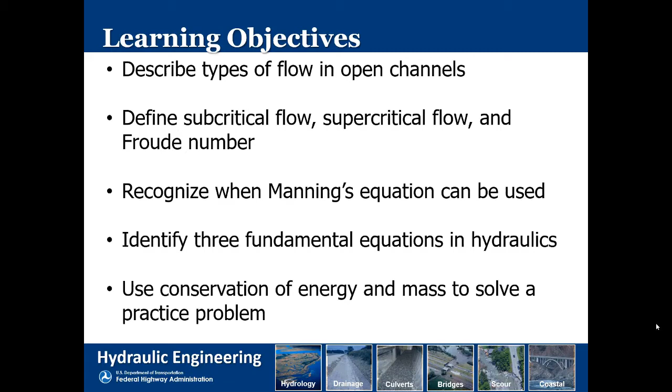And then we're going to do a couple of really quick practice problems using conservation of energy and conservation of mass to solve a couple practical problems.

So resources—one of the key things coming out of this, and one of your key takeaways: if you want more information on anything that we talk about during this week, where can I go to get that information? The primary source is the Federal Highway Hydraulic Engineering website. And if you're one of those folks who has trouble remembering all of the web links until you have it listed as one of your favorites, I'll do what I do.

I'm not actually supposed to say Google it. I think I'm supposed to use more general terminology because all of us government employees can't market proprietary things. But I always use Google - I find it to be the best web search engine, to be honest.

So if you ever wonder about any of these resources, HDS4, you can go into Google and type in HDS4, and it should point you in the direction of our website. We have lots of goodies up there - I think you were watching some of Jim's YouTube videos on culvert concepts, open channel flow concepts, inlet breaks, and other types of things. We continue to develop more videos, so stay tuned. We have about 3 different projects in the works with more hydraulics related YouTube videos.

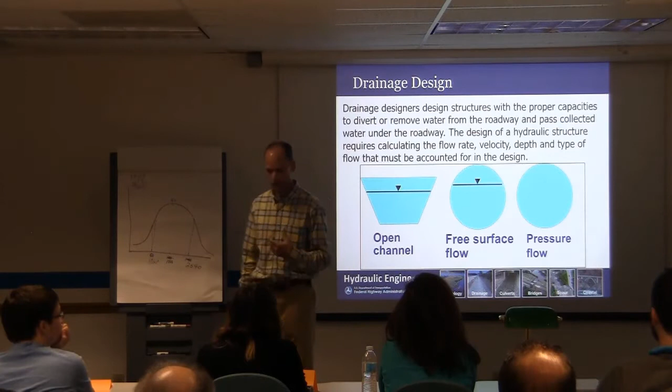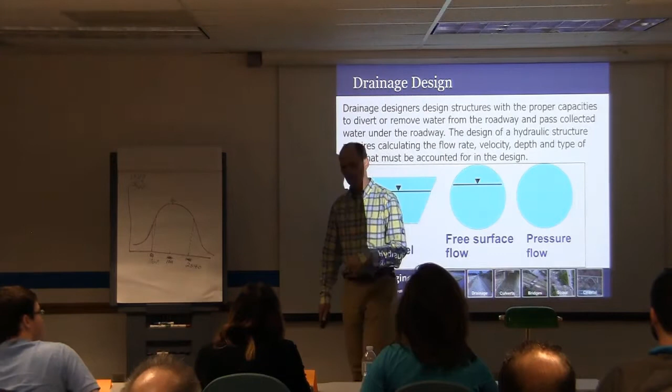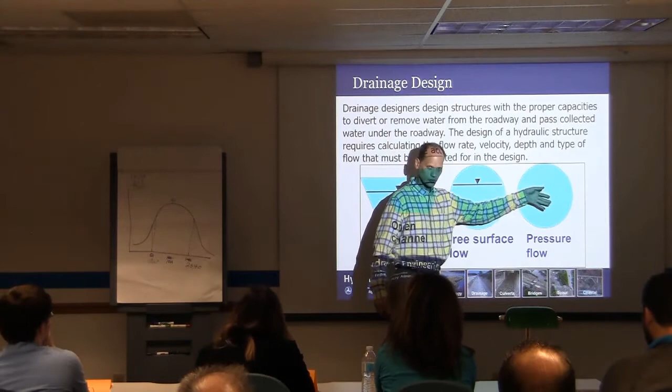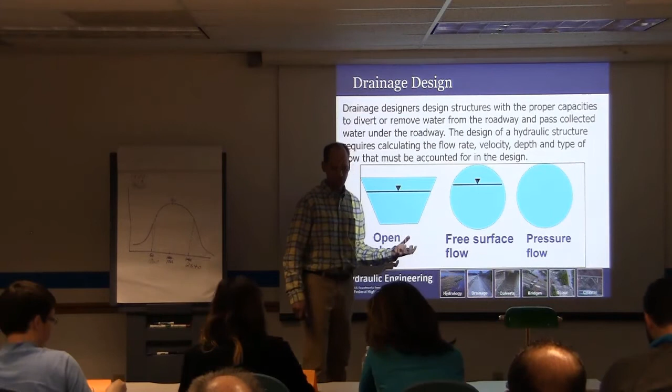Drainage design, we talked about it. We take our flows, our Qs, and then we calculate certain things. Some of the key parameters we're typically interested in: velocity, flow depth, shear stress, and those sorts of things. As roadway designers, you're primarily dealing with open channel flow, so you have a free surface that's exposed to atmospheric pressure, or free surface flow in a conduit. When you design your storm drains for gravity flow situations, they will have a free surface in the storm drain itself. Every once in a while we get into pressure flow - we'll talk tomorrow about outlet control culverts, and they flow in either a subcritical mode or a full flow mode. If they're flowing full, then they're in pressure flow. But we don't deal a lot with pressure flow in our careers - that's more water supply and distribution type stuff. And if you get into pump stations, then of course you have pressure flow situations too.

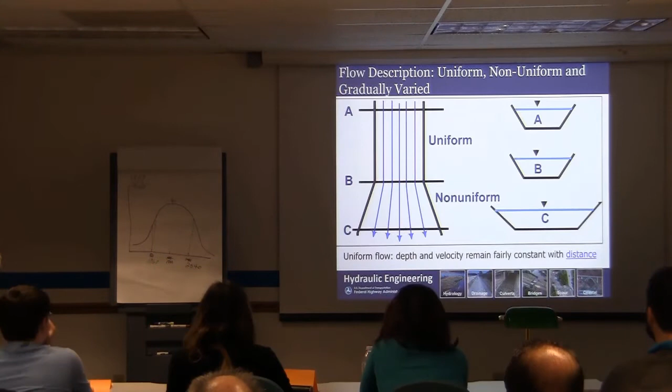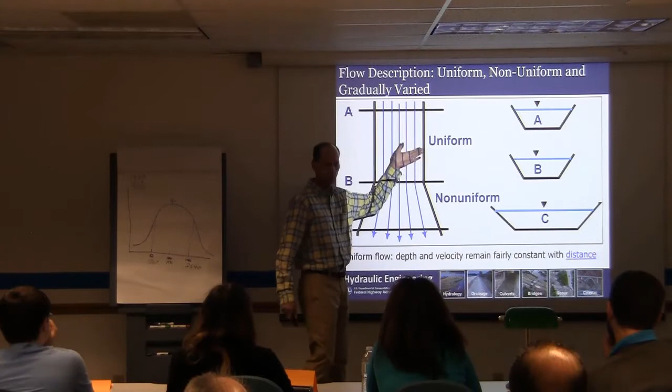All right, one key way we describe flow - remember, this is one of our learning outcomes - is uniform, non-uniform, and gradually varied. Uniform flow: the depth and velocity are fairly constant with distance - distance down your ditch line, distance down your open channel, distance through your culvert. If you have depth and velocity maintaining themselves in a fairly uniform fashion with distance, that's uniform flow. If your depths and velocities vary with distance, then it's non-uniform flow. Uniform flow in reality is very rare. Even with a prismatic or trapezoidal ditch line channel, you're going to have variations - you're going to have rocks in there, or a tree trunk or something, so you may have dips and bumps and things. So in reality, uniform flow is rare.

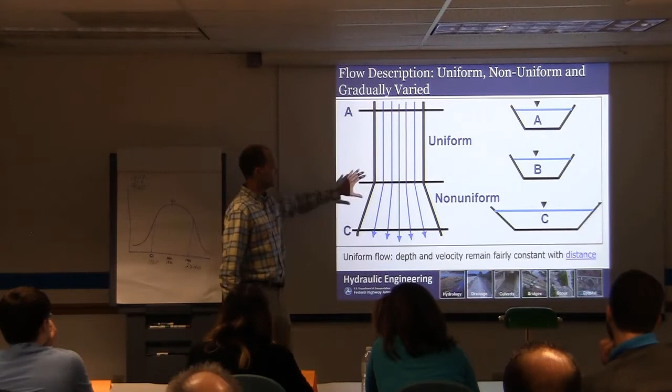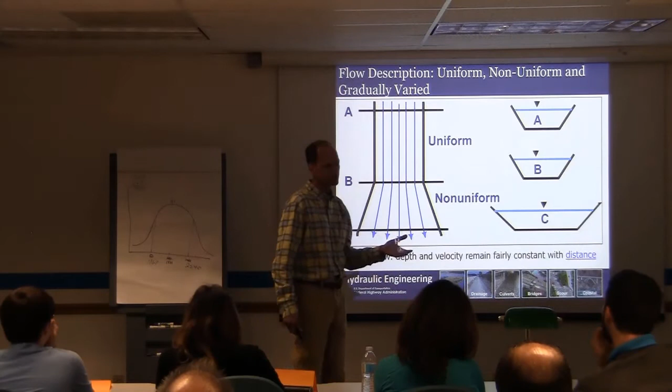We can get uniform flow in the laboratory through running water through a flume. In a lot of cases, we can get almost close to uniform flow. So actually, in reality, we look more towards gradually varied flow as probably more realistic, where you have some variations in depth and velocity with distance, but they're not to the degree where it's non-uniform. We're going to look at examples of these in a series of pictures coming up. So that's varying with distance - when you talk about uniform, non-uniform flow, automatically think about distance, and whether things are changing with distance.

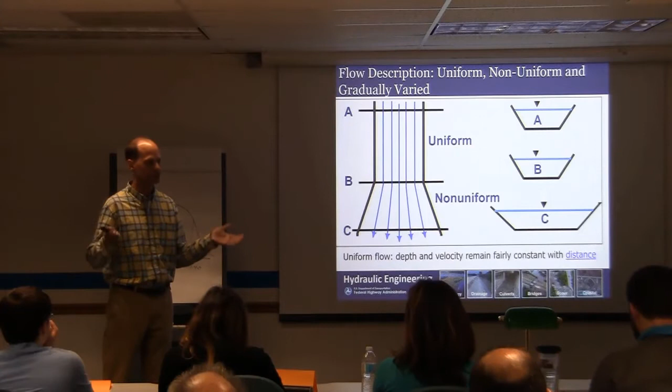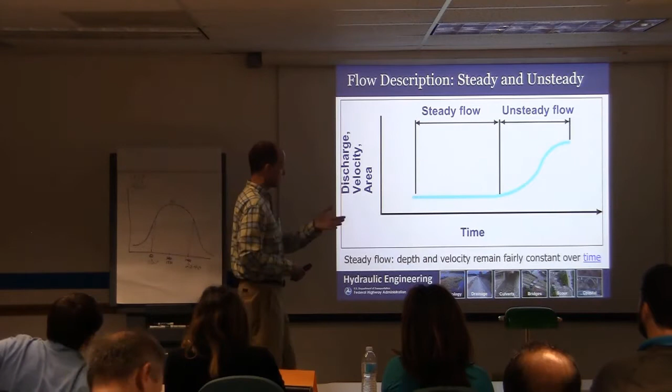Conversely, we also can describe flow as steady and unsteady. When you hear steady and unsteady, think about time, not distance. If you're standing on the riverbank looking across the channel, is the water surface going up and down with time? That's changing depth and velocity, and if it is, that's unsteady flow. If it's fairly consistent with time, maybe it hasn't rained in a while and you just have your normal base flow, groundwater feeding the channel, and it's fairly steady over hours and days, that's steady flow. So uniform and non-uniform describe distance, while steady and unsteady indicate a time component.

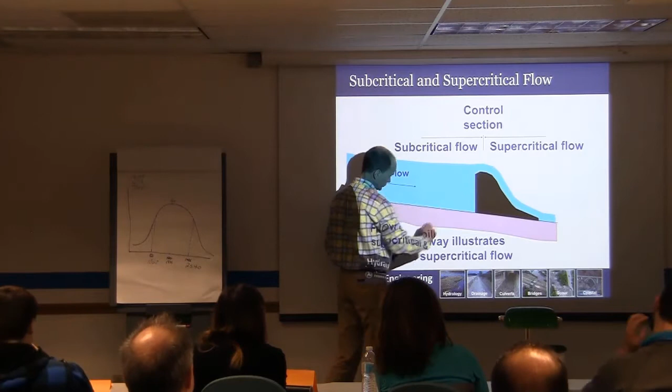Now into the good ones: subcritical and supercritical flow. Some of you have heard these terms before. We tend to envision water approaching and then going over a dam or spillway, like this ogee spillway shape here. On the upstream side, where you have some backwater, the water has built up and raised in elevation approaching the spillway. You may describe this flow as deep, more tranquil, slower moving. When you hear those terms, think of subcritical flow.

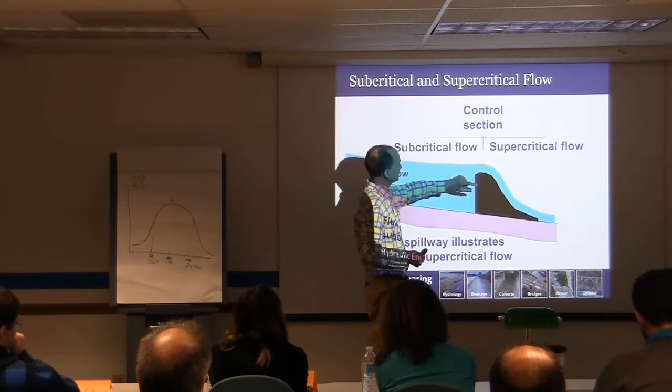And then the fun begins. It approaches the crest of the spillway and breaks through a control section. When you hear control section in the next couple of days, think critical depth. A control section is a point where we can actually calculate the exact depth of flow, so our control section here is critical depth.

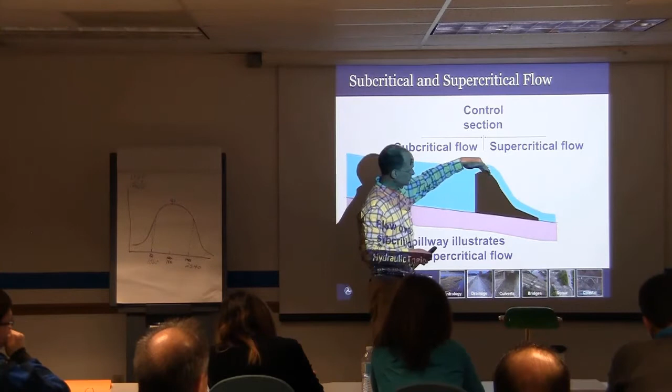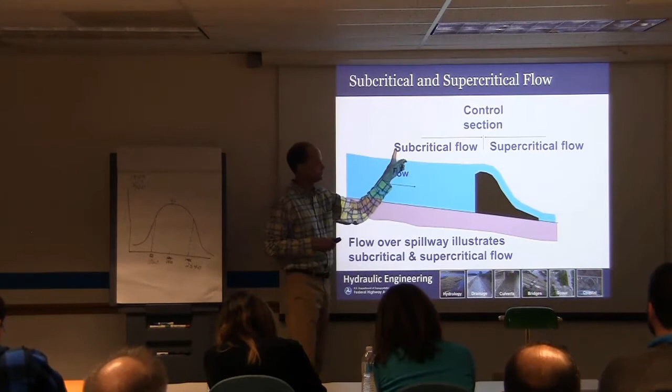So we have subcritical, deeper, tranquil flow approaching the ogee spillway, and then it goes over like a water slide shooting down, transitioning from subcritical to supercritical flow. Terms synonymous with supercritical flow: shallow, rapid, high velocity, lots of kinetic energy. Lots of kinetic energy in supercritical flow, lots of potential energy in subcritical flow. When you transition from sub to super, that's going through critical depth, your control section.

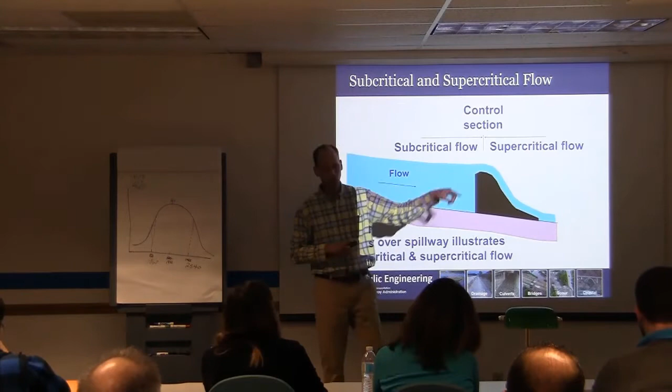How do you actually calculate if a flow is sub or supercritical? One good way is with our good friend, the Froude number. The Froude number is V over the square root of GY. V is the flow velocity, your average flow velocity, which you can estimate. The square root of GY is called celerity, the velocity of a shallow gravity wave.

So what does that mean? You go out to a lake with a nice big rock, put that rock into the water, and you see that wave spread out. The velocity that wave spreads out is the celerity. It's a ratio of these two, and you calculate a Froude number by taking the average cross-sectional velocity over the celerity.

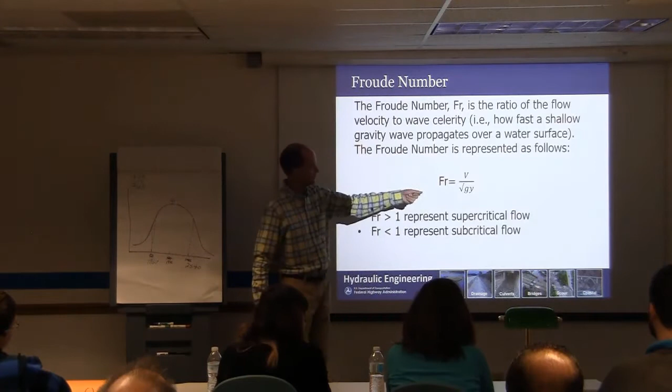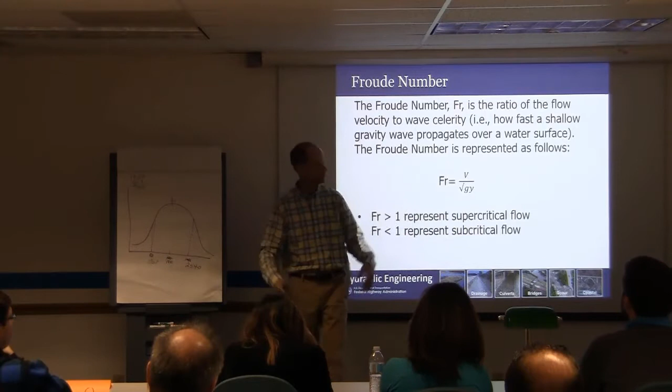If this number is larger than 1, your flow velocity is larger than the celerity of that wave. This means if you try to generate a shallow gravity wave by throwing that rock into a fairly fast moving stream, the wave will be washed downstream. Anything upstream doesn't even notice you threw a rock in there. The wave is just washed downstream, indicating a higher velocity. Supercritical flow has Froude numbers greater than 1.

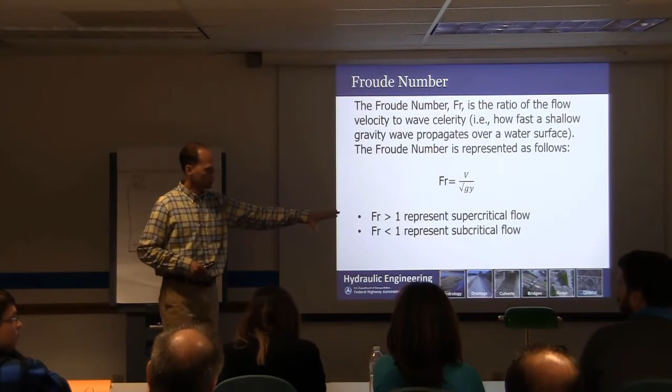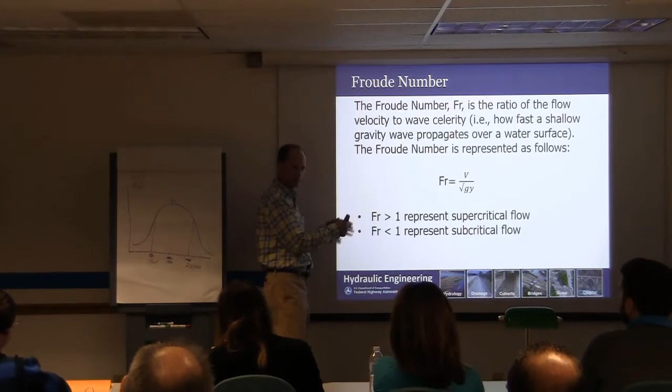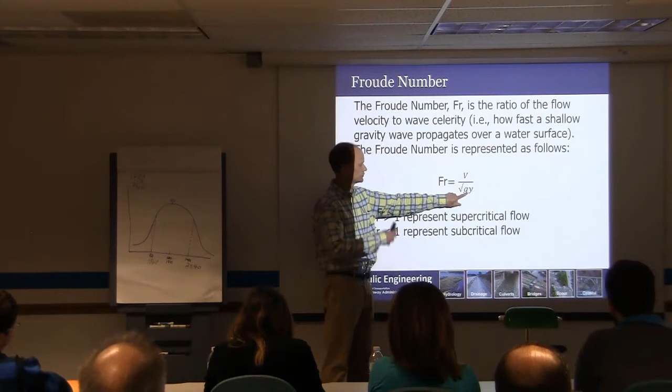Conversely, if you go out to that lake with a nice slow tributary coming in, a slow moving stream easing in, and you throw that rock in, it'll propagate downstream for sure, and some of that wave will also propagate upstream, because the velocity of that flow is less than the velocity of that shallow wave. So it moves upstream: slower moving velocity, Froude numbers less than 1, subcritical flow.

In between the two, where you have a Froude number exactly equal to 1, we say we're going to calculate this critical depth. In reality, there are places where you find critical depth, but it's at a point. Like when we had that ogee spillway, there's one point over the top of that spillway where you have critical depth. So you're not going to have it over an extended reach length, a ditch line, or stream. It's typically at a point, and it's a transition from sub to supercritical flow.

You can actually calculate critical depth. Here's a general equation for it: your flow associated with critical depth squared divided by the acceleration of gravity, the area of the flow associated with critical depth, the top width of the water.

Whenever you see capital T in hydraulics, that typically indicates the top width of your flow. So here's a general equation, and you can turn this into how you calculate critical depth for a rectangle. Other shapes become a lot more complicated, like trying to calculate critical depth of flow in a culvert, a circular section. So what they've done is develop charts where you go in with your flow and look up the critical depth in a pipe. I think they've done other shapes too. We don't care because we figure that out in the hydraulic toolbox, so we don't calculate it by hand.

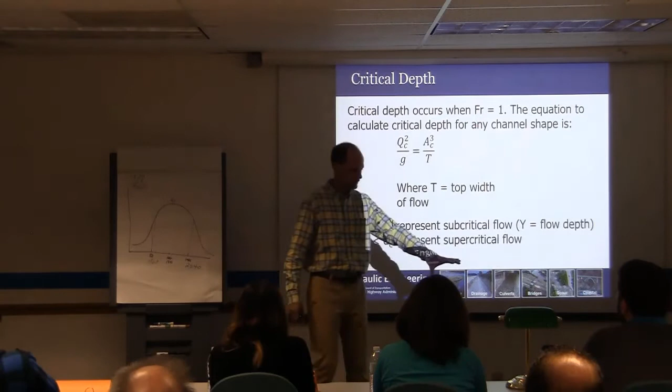If you calculate critical depth and say it's like a foot, that's dependent on your cross-sectional shape. Say we calculate this hypothetical critical depth and it's a foot. If we have water that's deeper than critical depth, what type of flow would that be? Deeper, it's subcritical depth, that's subcritical flow. If you have a flow depth of half a foot, it's shallower, less than critical depth, that flow would be described as supercritical. See how this is kind of all coming together?

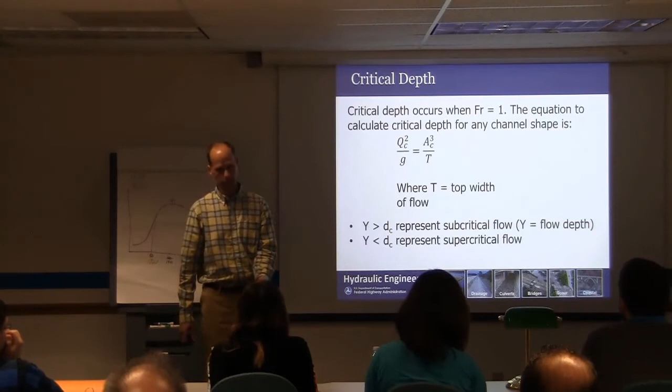If I personally were to describe supercritical flow to someone, I'd say it's kind of shallow, it's rapid. If you've done whitewater rafting, kind of bubbly, white watery. The Froude number is greater than 1, the depth is less than critical depth. These are all indications of supercritical flow.

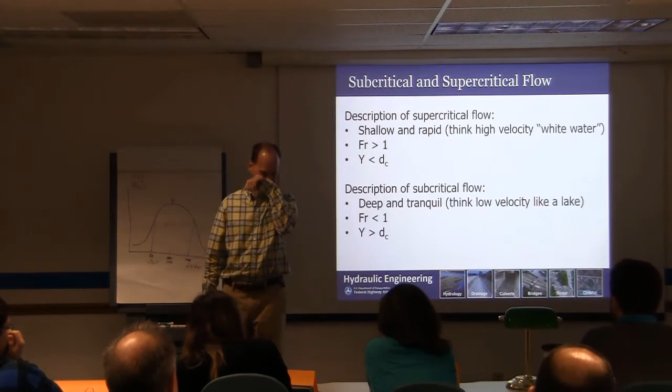Vice versa, subcritical flow - it's deeper, it's more tranquil. Picture yourself maybe in a pond or a lake or whatnot. That's really subcritical flow, but you're getting the idea. The Froude number's less than 1, the depth is greater than critical depth. Those are all indications of subcritical flow. It just sounds kind of mellow, right? Subcritical flow.

And why is the hydraulic depth correct? Or, I'm sorry, why is it just the flow depth? Technically, we use hydraulic depth in open channels. But we're just trying to keep things a little more general, so we're just saying flow depth, comparing that to our critical depth.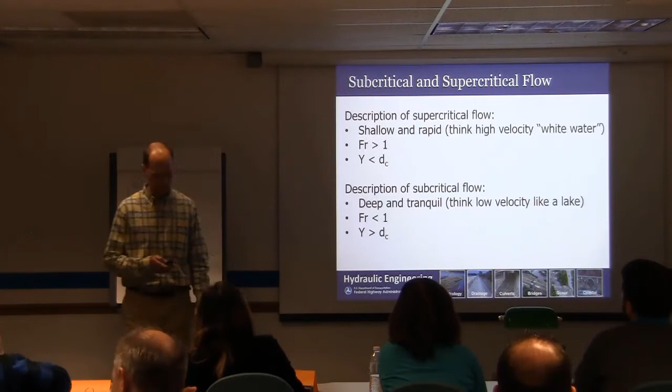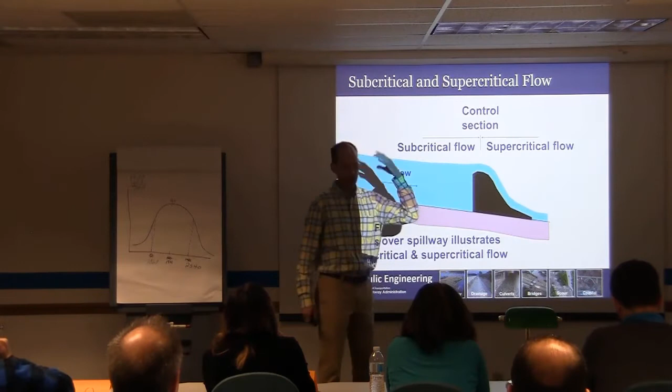So once again, this ogee spillway, and you'll see this again tomorrow when we talk about culverts - sub, super, control section. When you hear control section these next couple of days, think: where's critical depth? It's at the control section.

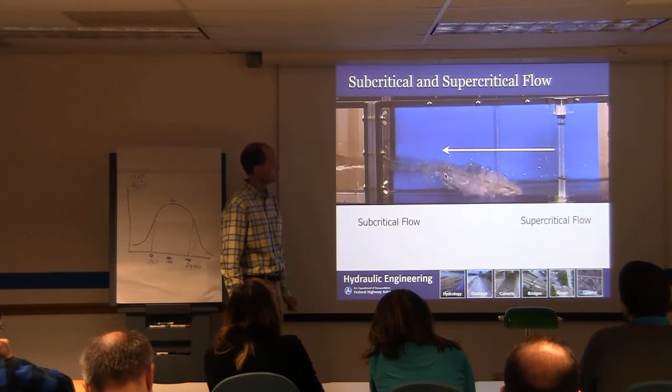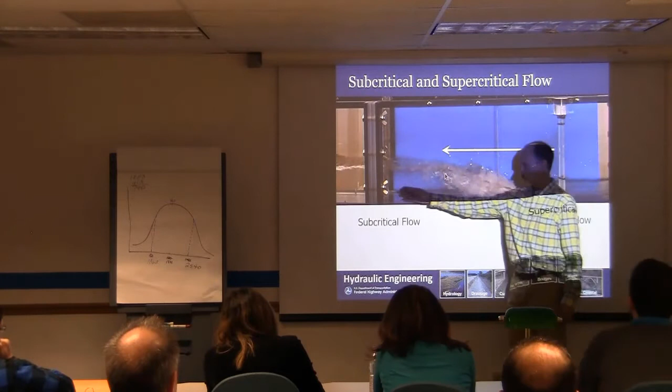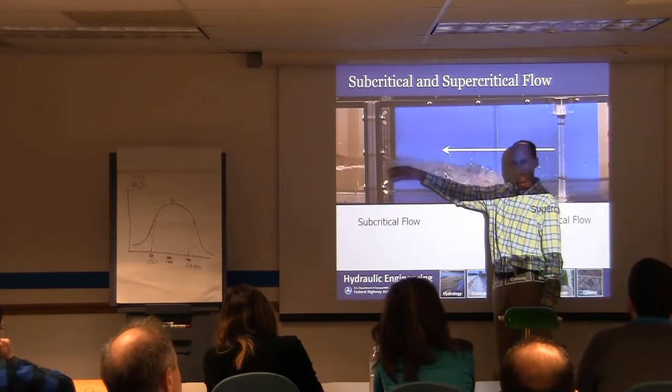If you watched those YouTube videos, I think Jim actually demonstrated a hydraulic jump, exactly. What you have here is this shallow, fast-moving flow, supercritical flow. And then all of a sudden you come into a situation where you have high tailwater or high downstream water level, and the momentum of this is smashing into that, and it's jumping up into subcritical, the deeper, slower moving flow, subcritical flow. That transition only goes this direction for a hydraulic jump - that's the transition from supercritical to subcritical.

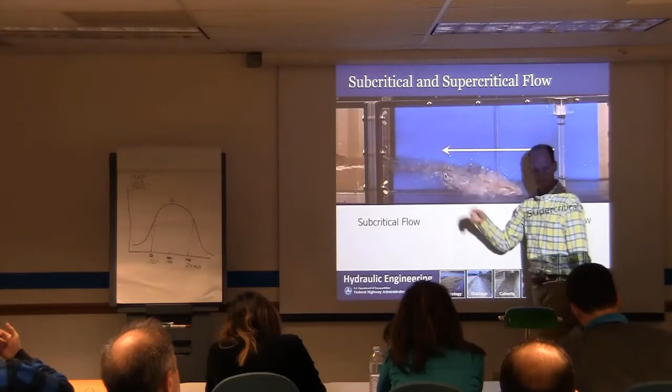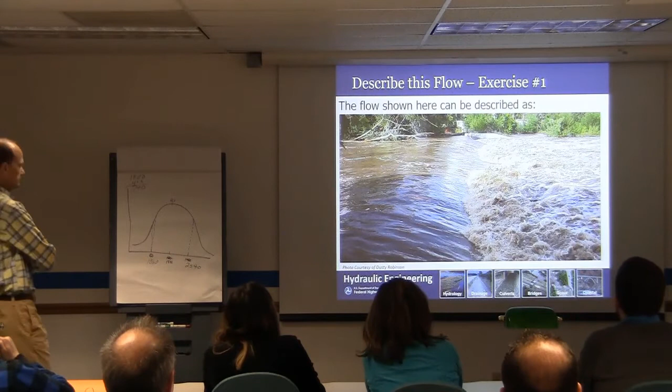All right, so let's practice. If you were to look at this and describe the flow and the different categories we just talked about, how would you describe this? Super. Okay, so I'm hearing on the left it looks like it's subcritical, it looks deeper, a little bit more mellow. I can buy that. And what do you see over here? Supercritical, yeah, it looks like supercritical, you see kind of like the white water, lots of turbulence and whatnot. That's definitely supercritical.

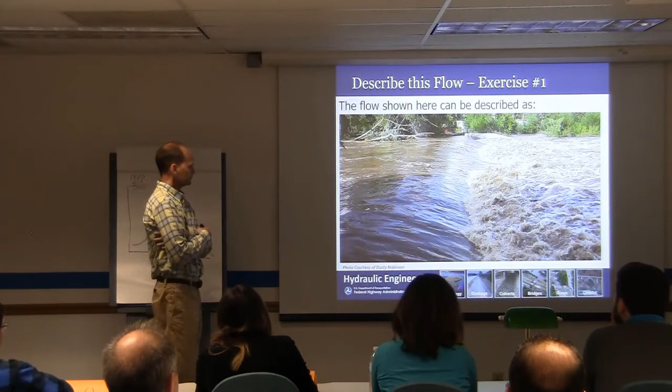Okay, so this is a question I have, and I think I know the answer but I'm not 100% sure - which direction do you think the flow's going? Towards the right. Okay, why do you think it's going to the right? Because if it's lower, you can't get sub to high - it's supercritical to subcritical.

Because it's crashing and everything, branches along the shore are pointing my way. Yeah, I think I was looking at that as one of the indicators, and I think you're exactly right. You think this might be weighed down by a root ball or something stuck in the water, and then eventually it turned this direction because the flow's moving that way. That's what I was thinking as one indicator. What else?

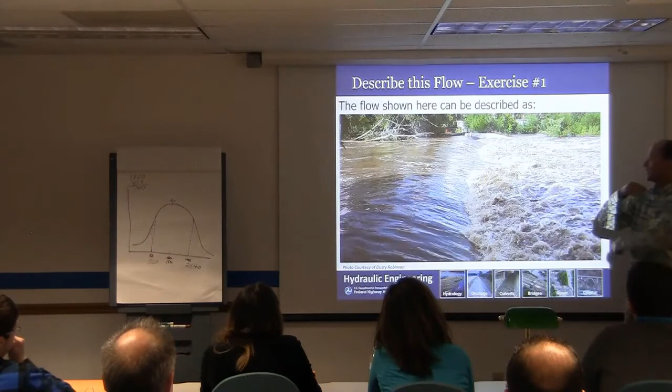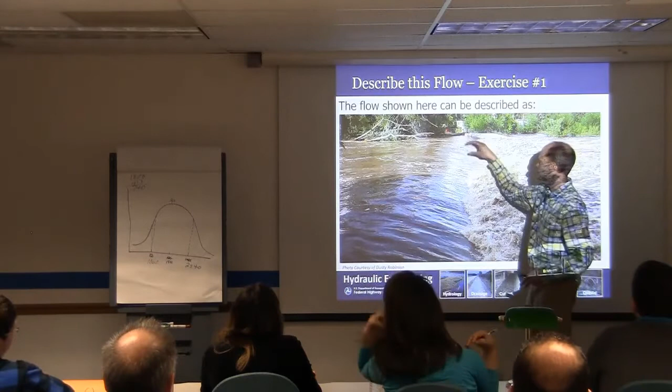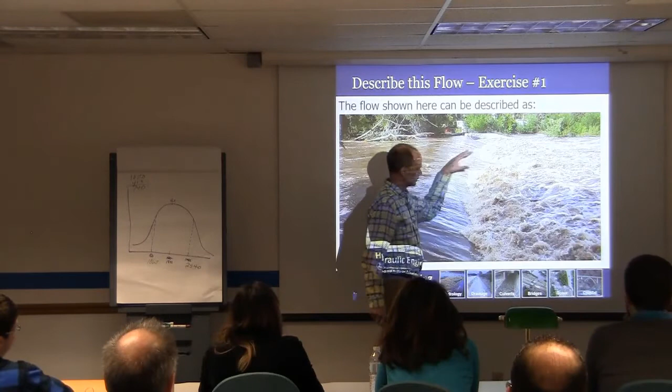I mean, could this be a hydraulic jump? In which case, water would have to be going this direction, right? I thought about that, and there's a pretty good demarcation line here. So I'm thinking if you see a hydraulic jump, it's kind of roiling and bubbling, and you would still see that occurring over a length here. That's why, apart from the tree branch pointing this way, I'm thinking water's cascading over here and doing some sort of funky turbulent circulation pattern. That's one of the things we do as hydraulic engineers, try to do some forensics and figure out what the flow is doing. That's one of the neat things we like to look at.

So you described this in sub and supercritical terms, but we talked about other ways to describe flow. What else is going on here? How else would you describe it? Yeah, well, it's open channel. Okay, perfect, who said that? Non-uniform, yes, Chris is a winner. He said non-uniform, right? Because we are seeing here that depth and velocity are indeed varying with distance. So this is non-uniform flow.

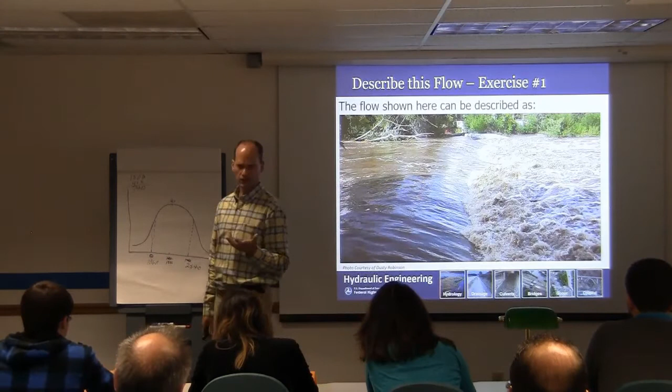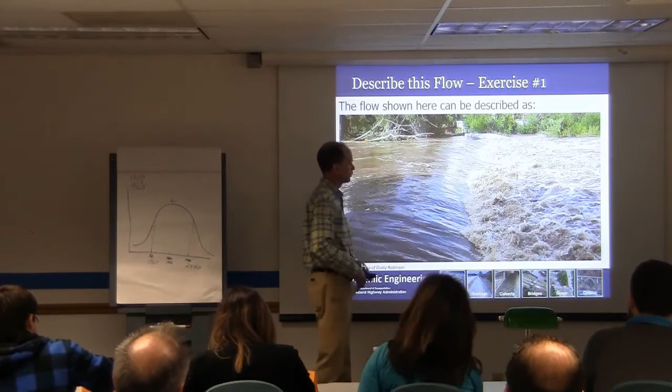What about steady, unsteady? Yeah, I mean, to get a good indication, you will see this probably bubbling around a little bit, but what we would really want to be looking for is whether there's significant raising and lowering of the water surface. Who knows? Looks kind of like a nice sunny day there, maybe things are fairly stationary. It might be kind of steady. I really don't know.

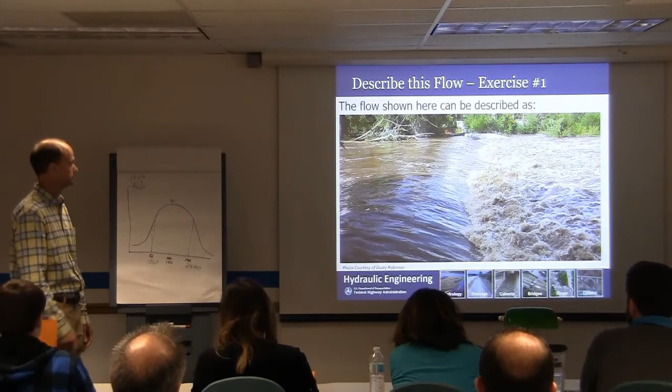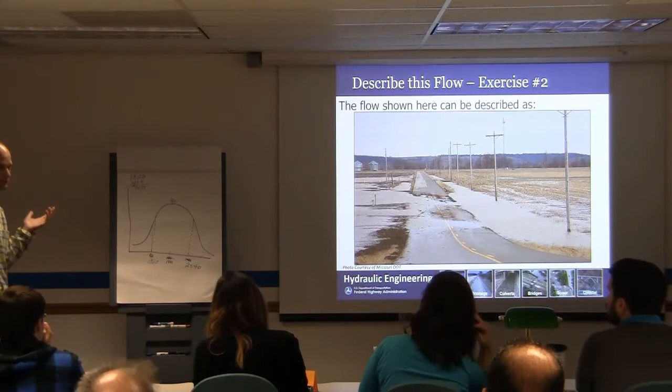Uniform, non-uniform. Yeah, it's probably doing all kinds of things, going over the road, and probably going out laterally at different points in the floodplain, going out, coming back in, so I would say it's probably non-uniform.

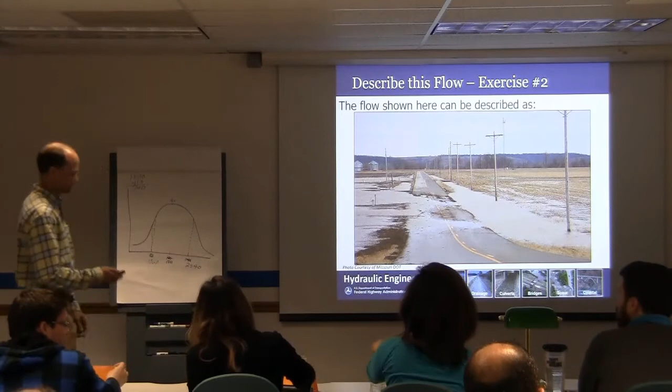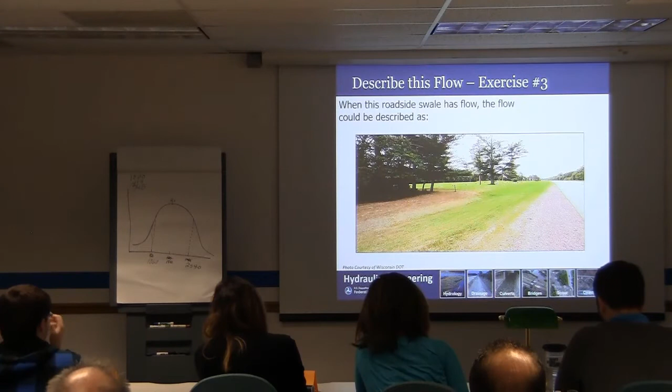All right, if there's water in this one, how would you describe it? Let's not worry about sub and supercritical at this point, but how would you categorize it as far as uniform, non-uniform, and steady, unsteady? Right, I mean, steady as you go. Yeah, I heard gradually varied, which is probably technically correct, but in most cases we would just assume it's uniform flow, right? And if you were actually designing this with your design discharge, then we would just consider it steady flow condition, steady uniform flow.

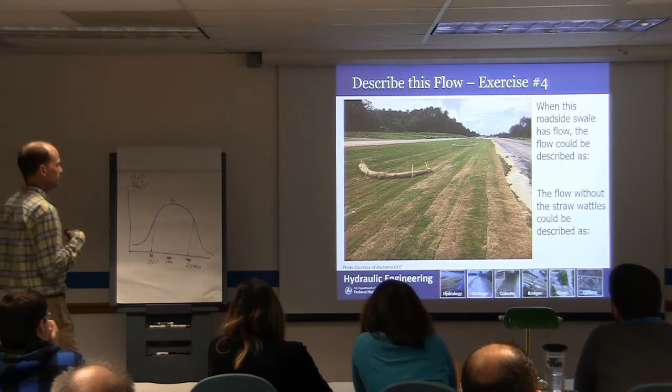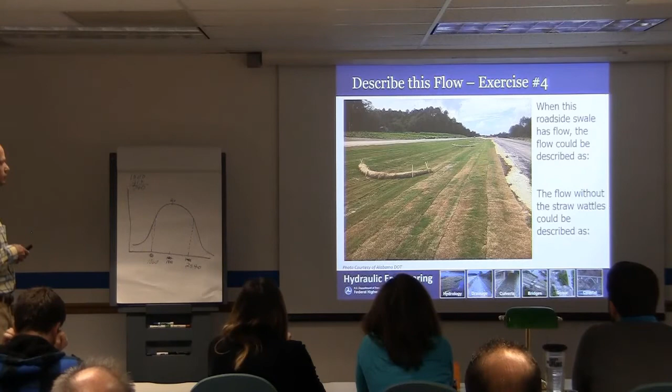So here is one that I think would definitely be more gradually varied with distance. And again, if you're choosing a peak discharge to design your median swales and roadside ditches, then we would say a steady flow condition. If you took those wattles out, it would be more like a uniform flow condition.

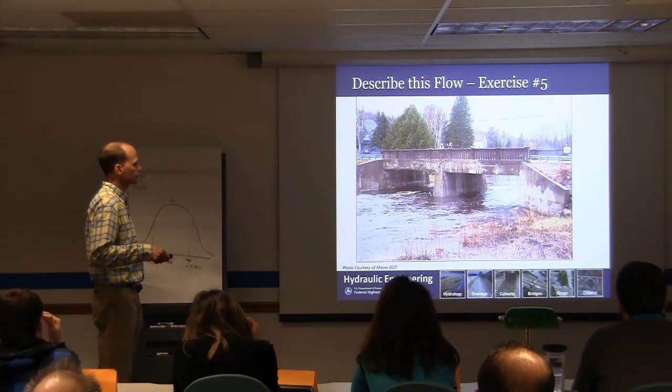Well, then you got natural conditions on both sides, and then you got that bridge kind of constricting it, right? That's a great point. We have a man-made structure here with walls and everything, so we have flow contracting through, coming in from the side and contracting through the opening. Even from that perspective, that's a great point. It's not going to be a uniform flow condition.

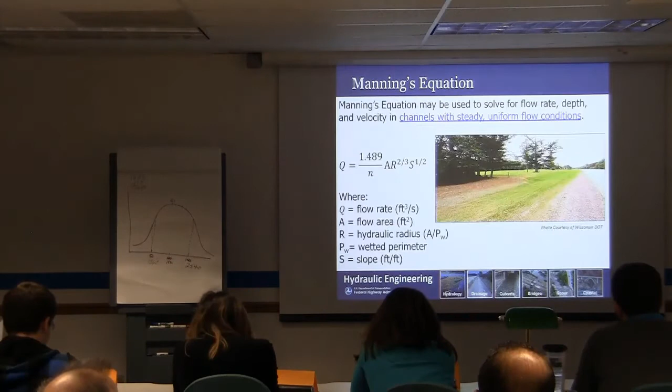All right, great. Why did we go through all of that? Well, we have our good friend Manning's equation that Veronica introduced to us this morning. She showed it in the original form with the velocity times your unit conversion for US customary units over the Manning's roughness coefficient times the hydraulic radius to the 2/3.

Whenever you see S in a hydraulic related equation, it's actually the energy slope. But if we have steady uniform flow conditions, the energy slope is the same as channel slope, right? And so what we see here is we use Manning's equation only for steady uniform flow conditions. A lot of those pictures we looked at and a lot of things we discussed were not steady uniform flow conditions. So the key takeaway is be very careful where you're using Manning's equation.

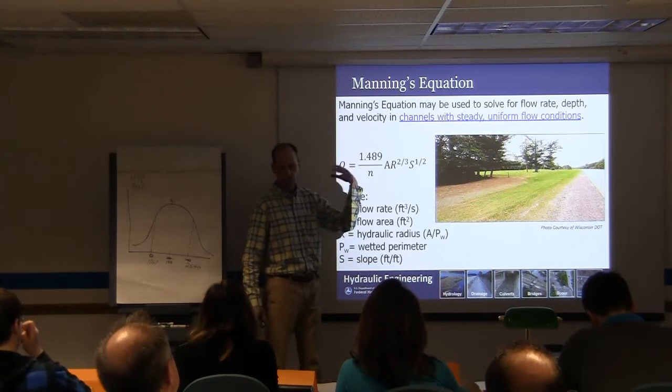Because with Manning's equation, if you know the flow rate, and if you have a fancy tool like the hydraulic toolbox, or maybe you have something that was developed in-house here, then you can calculate your flow depths and your average flow velocities. So it's a powerful equation, but it's only good for steady uniform flow conditions. If you do not have steady uniform flow conditions, you may be misapplying Manning's equation.

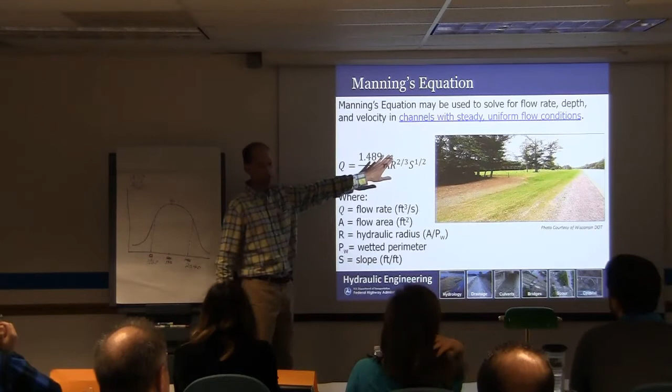So again, capital Q is our flow rate, and we went from V over here without an A, and then we just applied continuity, Q equals AV, and so we come up with Q times this, and then we inserted area on this side. And Veronica already talked about the hydraulic radius. We'll go over this stuff again, the wetted perimeter and the slope.

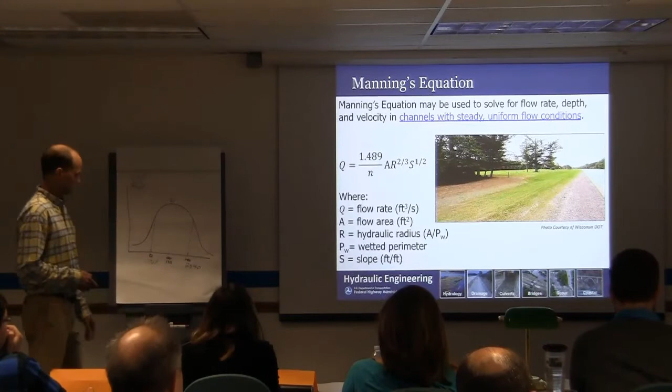All right, so that's Manning's equation. And then the three big equations that we typically talk about in hydraulic design: the continuity equation, which is mass conservation; the energy equation, which of course is energy conservation; and the momentum equation, which is the conservation of momentum.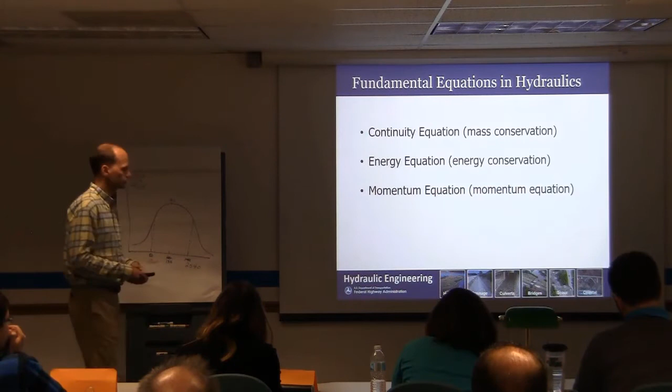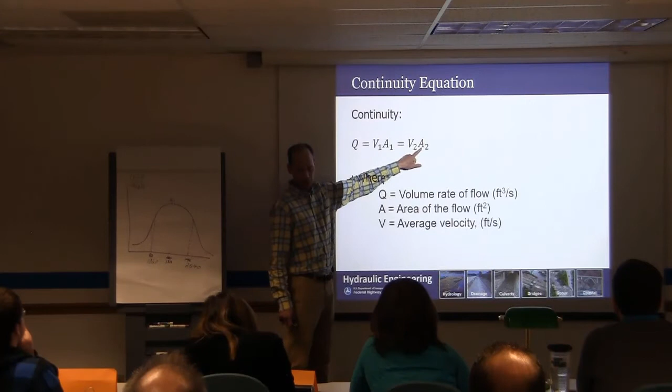Continuity, Q equals AV. Seems very simple, but we use it all the time, and it comes in really handy. So assuming that our flow rate is steady, and we have a certain velocity and area at one point in our ditch or our channel, at another point in that ditch or channel, if the area goes up, the velocity has to go down. If the velocity goes up, then the flow area has gone down, right? For the same Q.

Energy equation. Is there anyone who has not seen the energy equation? Maybe it's been a while. That's perfectly fine. I'm not familiar with the energy equation. Right, so there are key components, and they're put in terms of head.

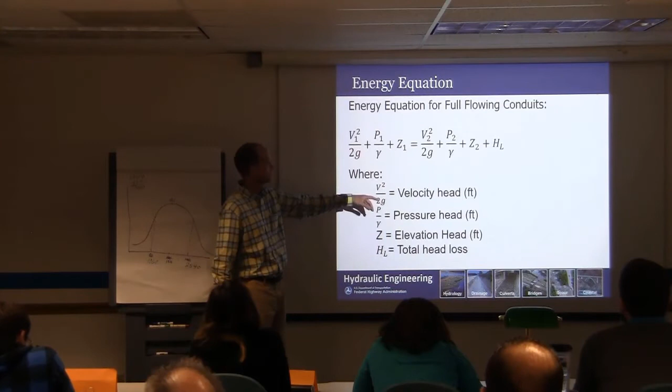And this is the velocity head, pressure head, and elevation head. Very powerful. It seems like a very simple concept, but again, it's a very powerful equation.

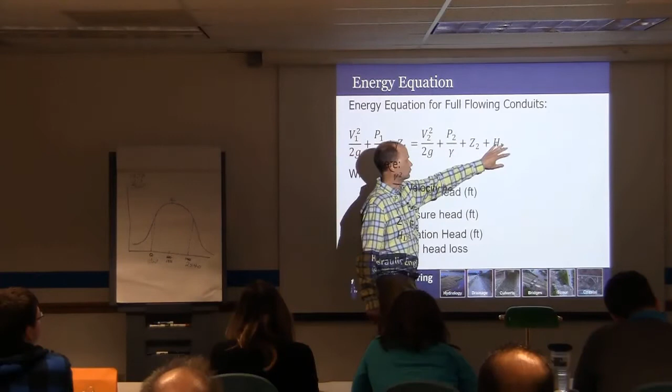And we say if we're at one point in our channel and then we go downstream in our channel, we have the same total amount of energy, which is made up of velocity head. But the only difference is there have been head losses in between where I'm standing upstream and then the downstream point. In open channel flow, we always lose energy as we go in the downstream direction. We always lose energy. And so if we want to say these two sides are equal, then we're adding at the downstream section the head losses back in.

There are two basic components of head loss, and it's the same kind of concept for open channel flow as for conduit flow. We have head loss due to roughness and friction. We have frictional resistance along our boundary, and so we're losing energy due to that frictional resistance. And then we have another component we used to call minor losses, but the preferred term nowadays is local losses.

And that's as flow is contracting, like going through a bridge or culvert opening. As that flow re-expands on the other side, as the flow goes through bends and elbows and fittings in water distribution systems, we have these local losses as the flow is doing certain things to move from the upstream point to the downstream point. Okay, so those are the two basic components of head loss.

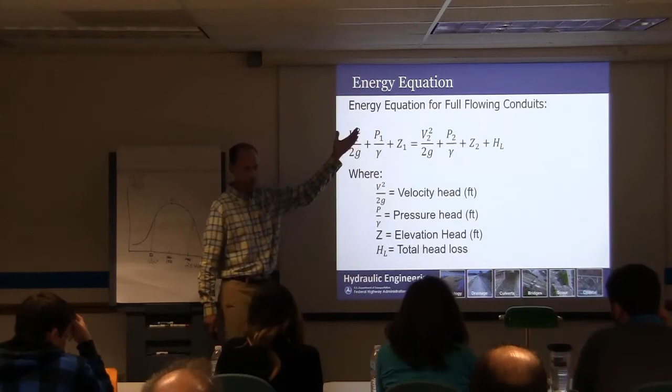All right, so the key here is in conduits and pressure flow, it's actually the pressure of the fluid divided by the specific weight of whatever fluid you're putting that in terms of, typically water, but it can be other types of fluid with other specific weights. The neat thing about open channel flow is your pressure term is just the flow depth. So in open channel flow, your pressure head is the flow depth.

The momentum equation states that the sum of forces on the system in a given direction equals the change in momentum. To really wrap your head around that, look at example problems, and HDS 4 has a good one, with a pipe that has a bend, where you're supposed to find the forces on that bend. Momentum comes into play where you have rapid acceleration and deceleration of flow, flow changing and going in multiple directions, when you need to calculate forces imparted on flow or as a result of flowing water.

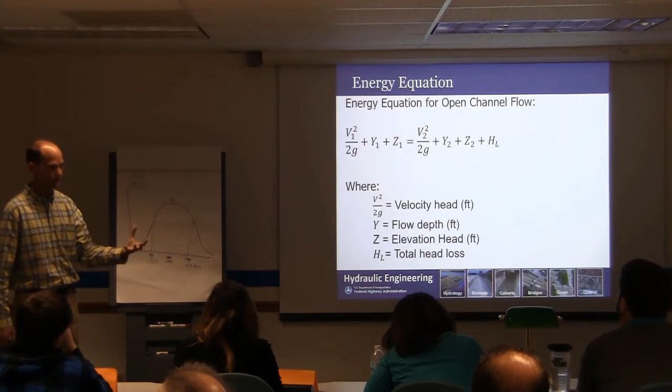As far as modeling goes, something like HEC-RAS 1D basically uses the energy equation and conservation of mass, doing standard step backwater calculations—that's the nuts and bolts of that hydraulic model. Whereas a more sophisticated two-dimensional model, like SRH 2D, or other 2D models, and HEC-RAS now has a 2D version, those models use conservation of mass and conservation of momentum for their solutions, because they look at flow and velocities in a plane, so it can go in all directions.

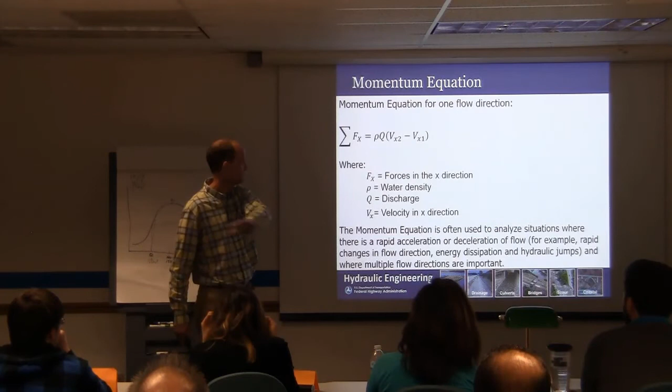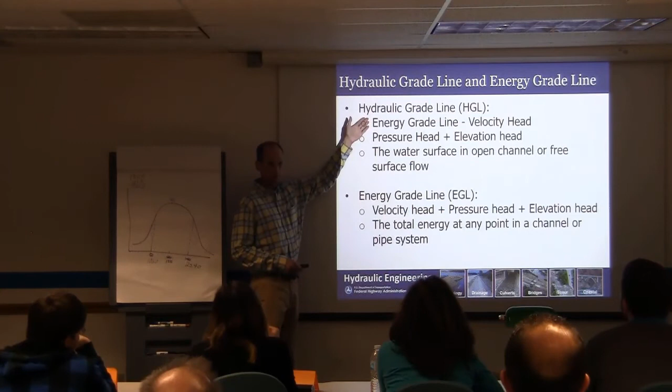So some other key terms associated with the energy equation—this is a little out of sequence, I should have put this right after the energy equation. The hydraulic grade line is made up of two components of the energy: it does not have the velocity head in it, it has the elevation head and the pressure head. The neat thing about open channel flow is the hydraulic grade line coincides with the water surface.

That's exactly right. The energy grade line is all three components—velocity head, pressure head, elevation head—so it's above the water surface.

It can be, so here's where we can start tying things together. If you have subcritical flow, the energy grade line and the hydraulic grade line are pretty close, because the velocity head in subcritical flow is fairly low. The energy grade line will still be above it, but not by very much. Vice versa, in supercritical flow, you'd expect to see more separation between the hydraulic grade line, which is the water surface, and the energy grade line, because you have more velocity head, and the velocity head is that difference between the two.

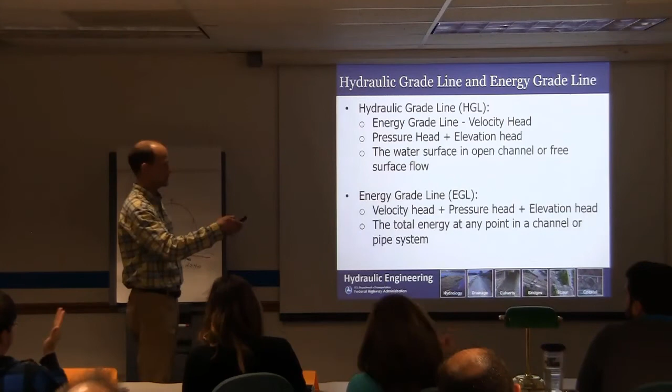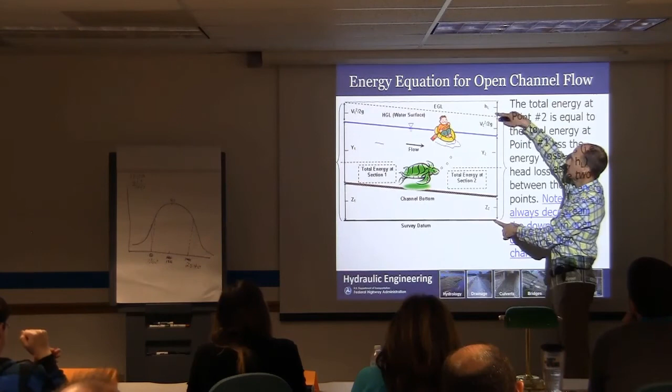This is just to illustrate that here's our total energy. The total energy at point 1 upstream is equal to the total energy at point 2 downstream, plus the head losses between those two points. Those head losses come from frictional resistance, which is the major form of head loss in open channel flow, and then local losses as you encounter flow going around bends and contracting and re-expanding and doing those sorts of things.

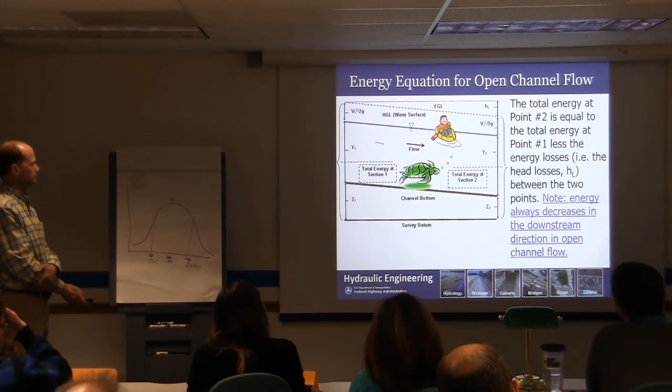Does that kind of make sense? Does it seem like review, or is some of this kind of new? We'll be discussing this further, again, because it's all important to doing our hydraulic calculations—that's why we're spending time on this.